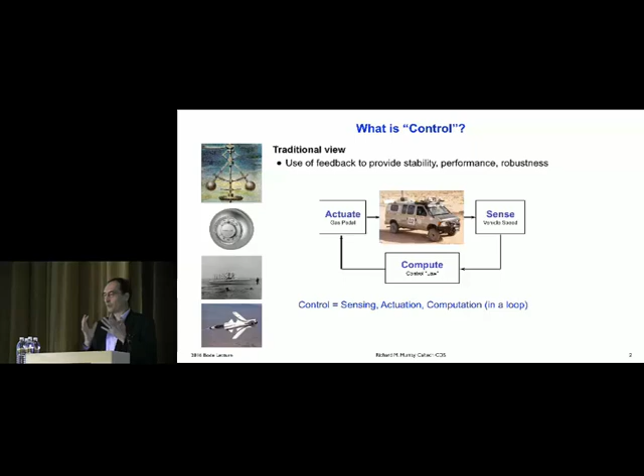But I think that this is changing some, particularly in the last 15 years or so. The emerging view that I would espouse is that control is a collection of tools and techniques for analyzing, designing, and implementing complex systems in the presence of uncertainty. In particular, it's this combination of dynamics, interconnection, communications, computing, and software that make controls work.

And so this notion of dynamics, uncertainty, feed forward, and feedback, just in case you forget, if you're a Simpsons fan, you can remember Duff beer. Duff should be the official beer of the Control Systems Society. And we'll remember that it's dynamics, uncertainty, feed forward, and feedback.

Now, there are a couple of principles that go along with that, and these are really unchanged over time. One principle is that feedback provides us a tool for managing uncertainty, both uncertainty in the system and uncertainty in the environment. Feedback and feed forward also provide us tools for the design of the dynamics of a system by combining sensing, actuation, and computation into the physical, chemical, biological, and information systems that we build.

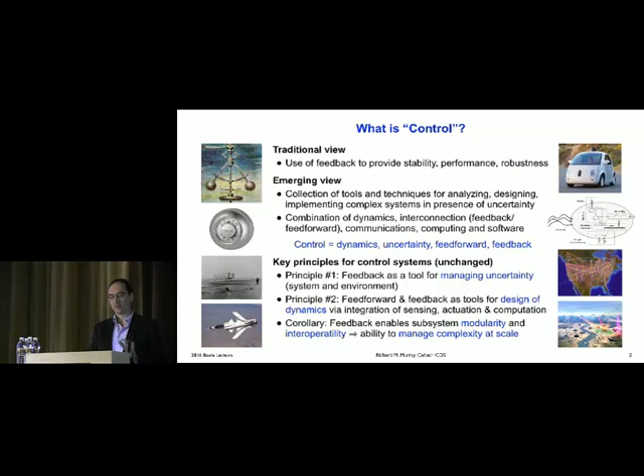These two properties together give a very important corollary, which is that feedback enables subsystem modularity and interoperability, and that's what allows us to manage complexity at scale. As we go forward, complexity at scale is the big challenge, and the control systems community is going to play a huge role in thinking about how we design complexity at scale.

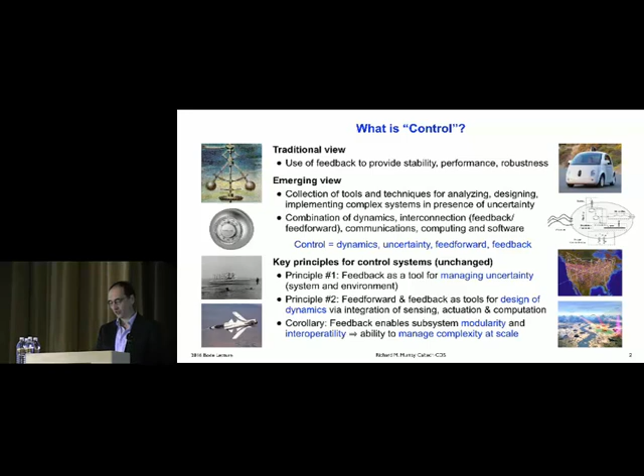Blogs didn't exist, Twitter didn't exist, et cetera, so you posted stuff on the web. And so I created a web page that was the top 10 research problems in nonlinear control. Why I thought I was qualified in any sense to write these down, I have no idea, but I did.

But a couple of them that were up there that turned out to be important in terms of what I actually did was this notion of using experiments to drive theory, thinking about writing good software for implementation of control, and transition to industry, right? How do we actually get these results to make a difference? And so I put these down in 95, and then sort of sat in my office and thought about these a little bit. And about 3 months later, I wrote down some new ones.

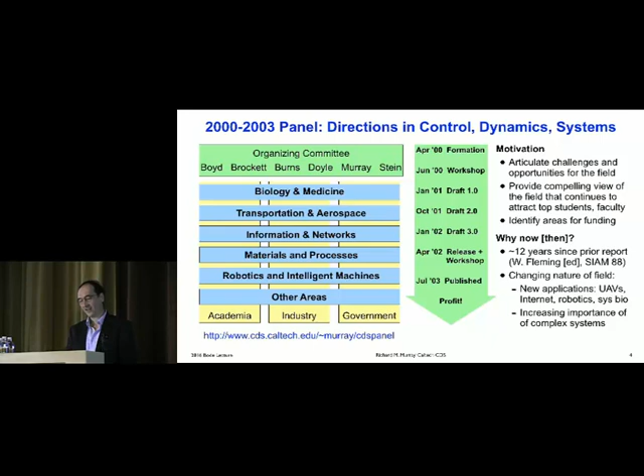That tried to pull together all of these ideas. And what's in the report, we organized it into an executive summary that tried in a few pages to describe why this was exciting. And then a next chapter that was a little bit longer that gave an overview of the field, what is control, along the lines of what I just talked about, the increasing importance of information-based systems, a summary of the opportunities and challenges.

And then in each of these application areas, we went through and talked about, right, what is happening in this area, why is this important, talked a little bit about education and outreach, and then made some recommendations and tried to justify those recommendations. So that was what we put into the report. And there were 5 primary recommendations at a high level that came out of this.

And those 5 were, first, to increase the integration of control, computer science, communications, and networking. Second, to increase the research at higher levels of decision-making, moving towards enterprise-level systems. Third, to explore high-risk, long-range applications of control, and we listed a bunch of areas that one might consider doing that in. Fourth, to maintain support for theory and interaction with mathematics, because we felt that that was something that had been very important for the field.

And fifth, to invest in new approaches to education and outreach to non-traditional audiences, right? To really make control something that was used more broadly than just the controls community itself. And so those were the 5 recommendations. And if you sort of look back and say, how'd we do? I think we actually did okay on most of these.

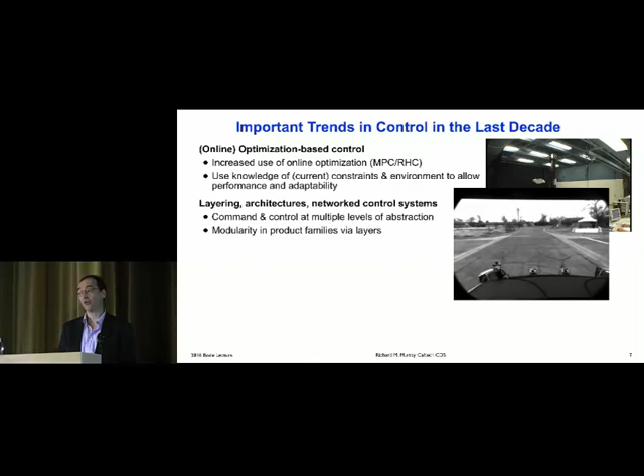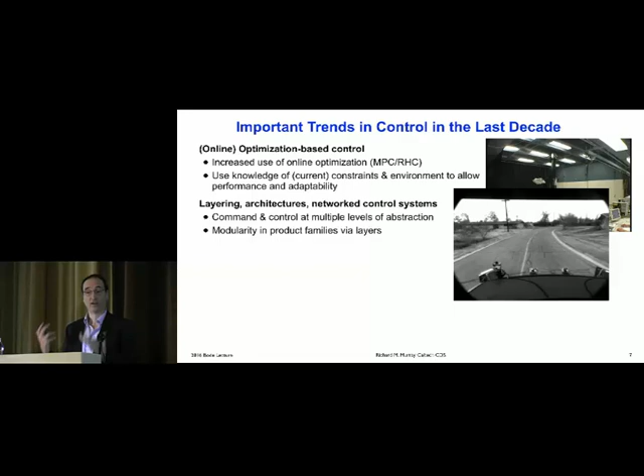So as I come up to an intersection and I see a car stopped, I need to know that that car is stopped. I need to stop behind it. I need to wait until it goes. Once it goes, I need to drive up to the intersection. And of course, this is the precursor for many of the things that we see in self-driving cars. This was a project that was done by a bunch of Caltech undergraduates, using some of the advances from our field. So I think that this is an important area as well that we've made great strides in. As I've already mentioned, I think one of the properties of control is that it allows this modularity that allows us to connect stuff up together very quickly and get very complex systems working together.

So we were thinking about this as you're playing soccer and you've got a bunch of people coming across the field and you want to guard each one of them. How do you do that in a distributed way? What information do you have to share? And it was a nice example of something where we wanted to prove that we could actually satisfy some property. So it was an example of applying these formal methods and thinking about hybrid and discrete systems, and the things that we're doing now in cyber-physical systems as a community.

And then the last area, I think, in which we started to make a lot of progress, this one's still a little bit more in its infancy, is thinking about moving to these enterprise scale systems. And in particular, as we look at things like the Internet of Things, the industrial internet, this is a GE term, I think that this is an area that we see happening in the world around us, and many of us are participating in.

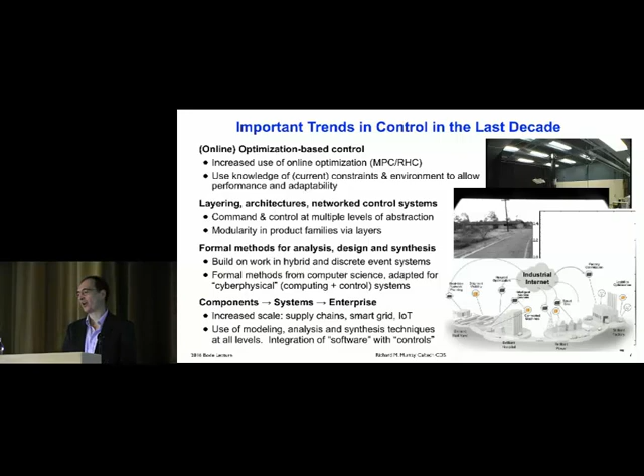The 5G communication network standards that people are talking about, they're talking about 50 billion devices, right? So how do we do things at the scale of some fraction of 50 billion devices, all managing our infrastructure systems and other things? So I think that that's something we're starting to see happening technologically, lots of future things we can do.

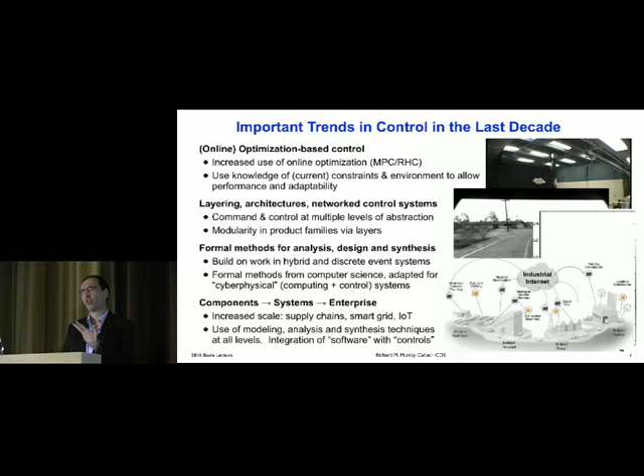Okay, so as we look back, I think that we sort of see what we were looking at, some of the things we missed, but a lot's happened, and I think it's a fantastic area. I want to talk a little bit about a couple of areas, and one of them is, what do things look like today in the area of network control systems? And so, as we think about what the design process looks like today as we design these complex systems, it's coming together quite nicely. There's still lots of work to be done, but it's coming together quite nicely.

We start with some physical system that we want to control. And of course, as control engineers, and increasingly we're getting involved in this very early in the system design, the first thing we do is we put together a model of the system, a model of the environment that the system is going to see. And we use that model to say, will this physical system satisfy it? Have I sized the actuators right? Can I turn the steering wheel fast? All of those sorts of things, depending on what the system is.

And if it's not quite right, we use that model to do design iterations, right? So we'll iterate on this design, and get it to where at least we have a nominal system that can satisfy the specifications. And then we'll start to design the feedback loops that go around that, perhaps starting with the inner loops and the lower level things where we're using sensors and simple Kalman filter processing, and PID loops and their ilk.

And again, at this stage, we may find out that the Bode integral formula tells us that you can't actually get all that you want out of this now that we start looking at the feedback properties and the noise rejection and other things. And so we may do new design iterations. Those design iterations may change sensing and actuation, may change the computational framework, the architecture, and other things.

And then we move progressively to higher levels of abstraction. So we move to an optimization-based layer where we'll start to do more complicated types of state estimation, maybe moving horizon estimation, particle filters, Bayesian inference types of things. On the control side, we'll do things that look more optimization based in terms of model predictive control, receding horizon control, and those sorts of online optimizations. And again, we may do design iterations here.

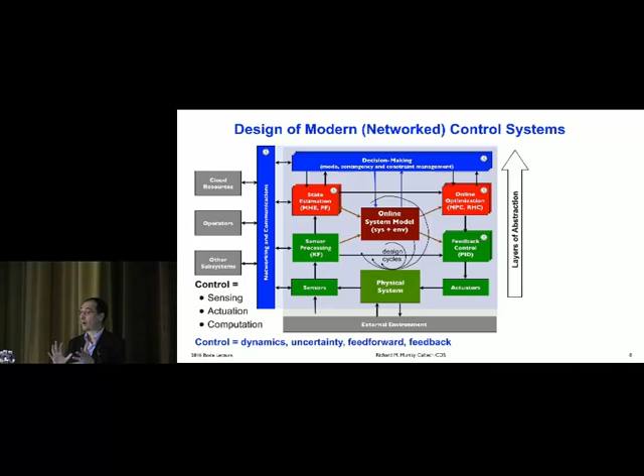And this is a problem where, if a computer scientist looks at it, they go, yeah, this is what we do too. They might look more at the higher levels than the lower levels, but we really have to look all across these. So there are examples of this all over the place: aerospace systems, self-driving cars, factory automation, process control, smart everything. And this is the type of architecture, I think, that we see, certainly in the industries that I interact with.

Now, there are a lot of challenges. One I think is interesting is to think about these layers of abstraction and how we connect them. How do we define what those layers of abstraction are and what the interfaces are between them? And how do we define what the contracts are? That is, what do I assume about the lower layer at the higher level, and what do I assume about the higher level at the lower level, so that when I interconnect these two things across these layers of abstraction, it works. And we know from the internet that those layers of abstraction and the modularity within them, the ability to change the underlying technology, is a huge enabler for moving forward quickly.

I think we also have to think about how we scale these to 50 billion devices or some fraction of that. You can think about that as scaling in the horizontal direction, so think about those as horizontal contracts. As we look at swarms and smart grid and other things where you have a bunch of systems at the same layer of abstraction trying to do the same thing but interconnected, how do we think about the horizontal contracts that might connect that together? And of course, all of this needs to be done thinking about stability, robustness, and importantly, security and privacy.

So this is, I think, what we need to think about and what we're currently doing in terms of control systems. And so I want to talk about a couple of the pieces of this just a little bit to give more insight and say a little about where I think there's some opportunities to do even more. So one is in the area of formal methods and control.

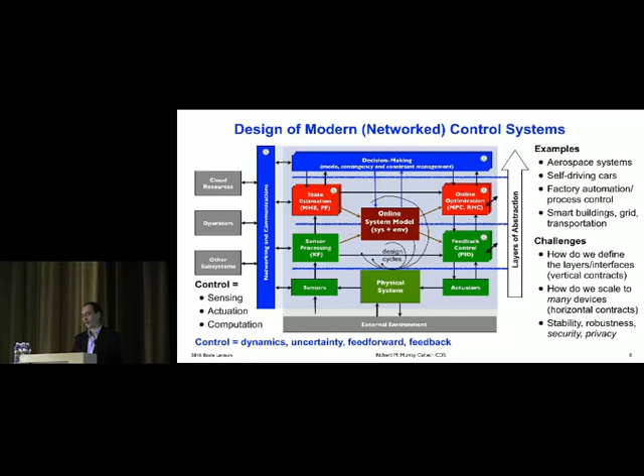And so Claire Tomlin asked me to give a talk at Berkeley, and she gave me the title of the talk. And so it was rapprochement between formal methods and control. I had to look up what rapprochement meant. But it was quite nice, right? Sort of the bringing back together, right? So reapproach of these two areas. And I think that's a very accurate thing.

So the discrete event systems community has been thinking about this for a long time, but really there'd been kind of computer science going off and controls going off, right? And now I think the two are starting to come back together, somewhat enabled by the history of the discrete event community in terms of doing that, but I think building more.

On the controls community, we'll think about a block diagram that looks like this, with apologies to John Doyle for drawing the arrows backwards. And the type of specification that we might do here at a high level might be some sort of an H-infinity style specification, right, where we say that we want some output measures, errors or whatever they are, to be bounded based on the disturbances, and also allow for system uncertainty, right? So we're going to capture that uncertainty.

And so certainly here we see dynamics and interconnection and feedback, if not feed forward explicitly, although as we know in many of these systems there'll also be a feed forward component. Now, we can redraw that diagram just a little bit as something that might look like this. So now we've got a plant, a controller, some sort of environment, unknown environment maybe, or the delta block up there could represent system dynamics or environmental dynamics and disturbances.

But I think an interesting question is to say, well, what happens when our description of all of those is in fact a discrete transition system, not differential equations or transfer functions? So now it's the same problem, right? This is the problem of how do I make decisions at a decision-making layer of abstraction in presence of uncertainty with dynamics for my system. I can't just make decisions arbitrarily for, say, self-driving and other things. I have to do so in a way that respects whatever the rules are, specifications are, other things.

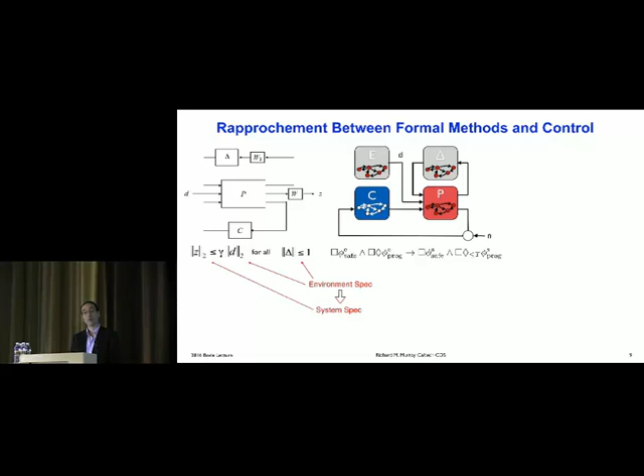And what I like about these two problems, the H-infinity synthesis problem and the GR1 synthesis problem, is they're basically both of the same form. There's an environmental spec that tells us something about both the disturbances and the unmodeled dynamics of the system or the environment. There's a system spec, what do we want it to do? And similarly, in GR1 synthesis, there's an environmental spec, as well as a system-level spec. And the synthesis problem is, given a model of the system and that specification, synthesize the decision-making logic that automatically makes that controller work.

And we do this in controls all the time. An LQR controller, I give you x dot equals Ax plus Bu. I give you a cost function that I want you to minimize, and I call the LQR command, right? And so we want to do the same thing now on this other side. And so this is, I think, an exciting area. It is very much, in some sense, at the heart of things like cyber-physical systems.

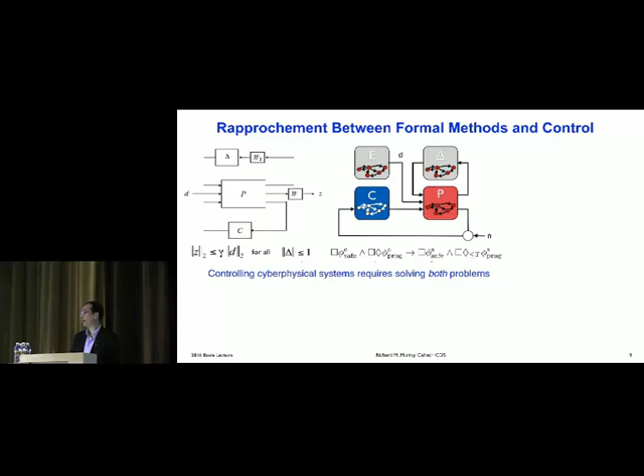And of course, you can't just solve one or the other. Well, you can, but then you will be relegated to your layer and not the layers in between. And so I think we have to figure out how to pull these things together and do this. And there are many examples, from aircraft to self-driving cars to the industrial internet, to do that.

And broadly speaking, I think that we really are starting to get more serious and more rigorous about the control of these sorts of reactive systems. The systems are clearly too complex to be tested by trial and error. We must use more formal methods. The controls community is fantastic at using theory to help solve problems.

The systems are much too safety critical to do this, so people probably know that for software, which is what control systems are these days, running in aircraft, you have to certify your safety critical software, so things that might lead to loss of human life have to be shown to be reliable, to have no more than one failure in every 10 to the 9th flight hours.

10 to the 9th flight hours is 100,000 years. How do you show that? You don't do it by testing. You have to do it by rigorous analysis combined with testing. And sort of think about that.

The other thing I think that we're starting to see a little bit of is moving from this design then verify, here's the logic, go tell me that it does the right thing, to more of a specify then synthesize. Tell me what you want the system to do, and then I will automatically synthesize the logic. And again, the controls community has been doing this for a long time. We're starting to see this come up a little bit more in the hybrid systems and computer science communities.

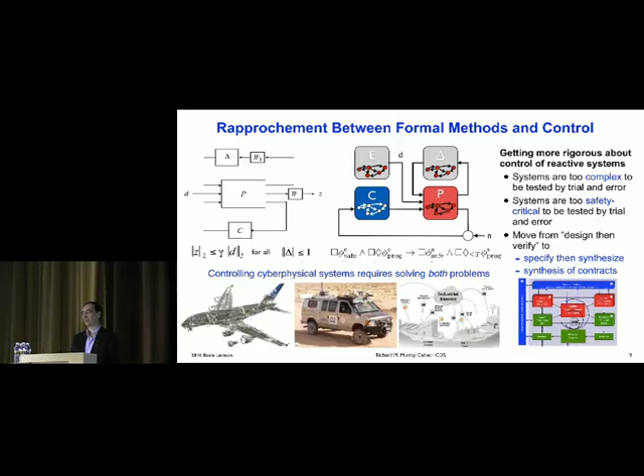I think a next step of that is to think about what are the contracts that we need to use at the different layers of abstraction, so that we can now synthesize the contracts. Here's what that optimization-based controller should do in terms of its specifications, so that when I connect it with a decision-making level and I connect it with a feedback controller, the overall system will behave in the right way. And so I think we need to think about how to do that, and some work is starting to happen there.

Another thing that we're starting to see a little bit more is combining both data-driven and formal methods types of systems together with controls and thinking about human-like interactions. And again, self-driving cars is really pushing this forward as we have to think about how do we make sure that humans can operate in environments that machines are operating.

And finally, I'll just point out again, for about the 5th time, that we need to be incorporating security and privacy guarantees as we do this. We don't want to redo what we've done before in SCADA systems and other things. It's not 'think about that, it'll get handled later.' No, it won't. We've got to think about it now.

And again, these ideas of formal methods and control and other things, there's great connections between observability and reachability and things like privacy and security. And so I think that the tools can come together there. Okay, so this is, I think, an area that when I look out now, I see lots of promise and lots of people working on it across the community. We see many things here at CDC about this.

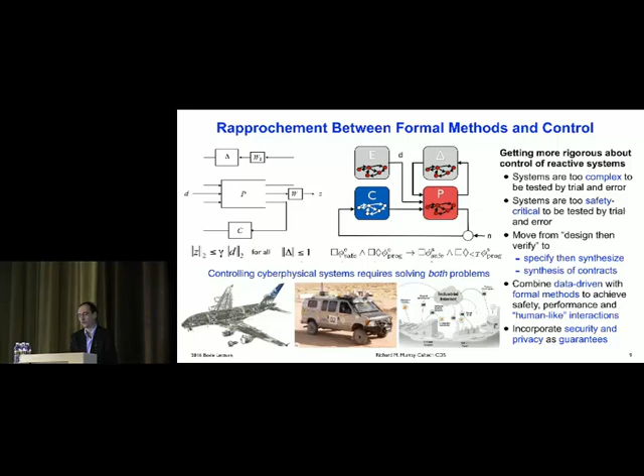So where do we go from here? This is sort of what's happening and what's currently here. So I think there are some opportunities for the future, and I've divided them into 2 pieces. One that I'll call traditional, and I don't mean it in a derogatory sense, but thinking about the things that we know that we do well. And so certainly one is what I've just been talking about. I think we need to continue our focus on rigorous design of complex systems.

One of the things that in the last couple of years I finally understood, people have been trying to tell me for a long time, I used to say, oh, Cyberphysical, how clever, they renamed hybrid systems, and they got more money for it. That's pretty cool, that's a good idea. Because you can't fund hybrid forever. So let's just call it Cyberphysical. But in fact, that's not right. Cyberphysical systems are different, because they're really bringing a computer science perspective to the control of physical systems.

So the cyber there matters. It's not just continuous and discrete. It's thinking about the things that computer scientists think about, right? And thinking about verification and model checking and scale and all of the other things that computer science has done so well. And really, that to me was like, oh man, I finally get it. I'm sort of working in this area, and it finally occurs to me why cyberphysical really is something that's kind of new and different.

I think the other thing that we have to think about is large-scale systems. The Internet of Things is coming. It's an opportunity. It's going to have huge numbers of devices on it, and we're going to start connecting those together. The 5G networks, right? People should remember the fifth G stands for control, right? Because really it's putting in the time criticality and other things. That's one of the goals of the 5G networks, to get the time criticality down to where you can use it for feedback control systems.

So guess what? We're going to get to use it for feedback control systems, but we're going to have subsystems that consist of thousands and millions of devices that are being connected together. And so how do we think about that, I think, is a good one. And again, data, security, privacy, humans, the things we missed the first time around, let's not miss them this time as we go through.

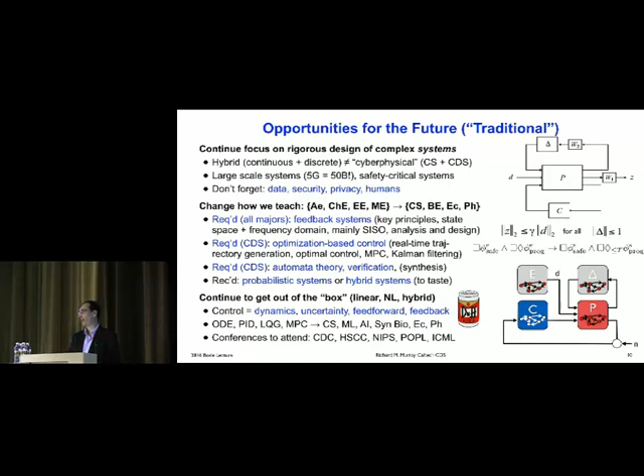So again, I would say we should think about control as the field that combines dynamics, uncertainty, feed forward, and feedback. Have a couple of beers, think about what that means. I think we need to go from just thinking about things like ODEs, PID, LQG, and MPC to thinking about computer science, machine learning, artificial intelligence, synthetic biology, economics, physics as what we think about as a field. And in addition to coming to conferences like CDC and HSCC, we should go to things like NIPS and POPL and ICML. And if you don't know what those are, go look them up, because they're important conferences for us to be represented in, and for those people to be represented here.

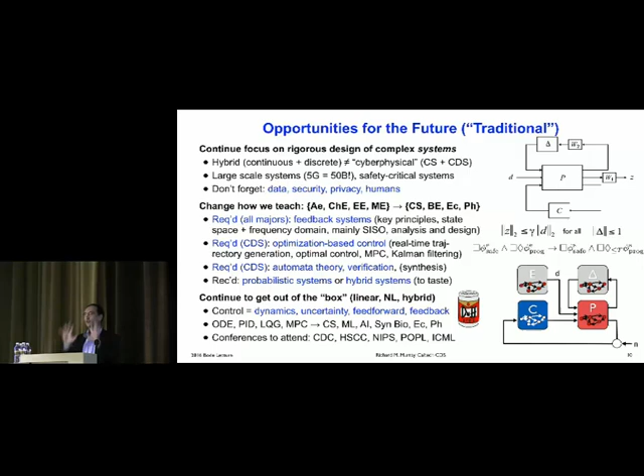All right, so in the kind of mainstream areas, I think this is one. I want to also talk a little bit about what I'll call non-traditional. And here I want to build on this recommendation from the panel report back in 2003 about exploring high-risk, long-range applications of control. In this area we have to recognize that this may be different than the more traditional ones. In particular, we may actually require new types of sensing, actuation, and computation, plus new architectures that are tuned to that. And it may not be the same as what we do in other areas. I'll use as my example an area that many of you know I've been interested in for a while, synthetic biology.

So here's what I'd like to do before I retire. I'd like to build the system you see on the right. This is a nanoscale machine. It has a bunch of subsystems in it. It has a power subsystem called metabolism. It has a sensing subsystem, an actuation subsystem, a communication subsystem, a computation subsystem. And all of these subsystems are regulated and co-regulated. This is, for me, an autonomous vehicle. But this autonomous vehicle is a couple of microns long. I don't know how to build that out of metal or other materials, silicon, et cetera. But biology knows how to build that out of molecules. So if we think about that as a design problem, can we design a 1 to 2 micron long robot that can find a toxin and neutralize it?

Or assemble a bunch of chemicals into food, right? We know this is possible, right? No question. Can we as engineers design such systems? And I don't care about the systems being living. In fact, I don't want them to be living. I want to design, I want to put it together. If I turn the power off, I want it to stop working, right? But I want to do it at that scale.

And so I think if we think about that problem, that one may require us thinking about, okay, fine. What does the sensing system actually look like? What's the actuation system? How are you going to do computation? So, for example, this is some of the work that we've done in this area. This is a proportional control law. All right? So this is describing a genetic network that implements a proportional control law.

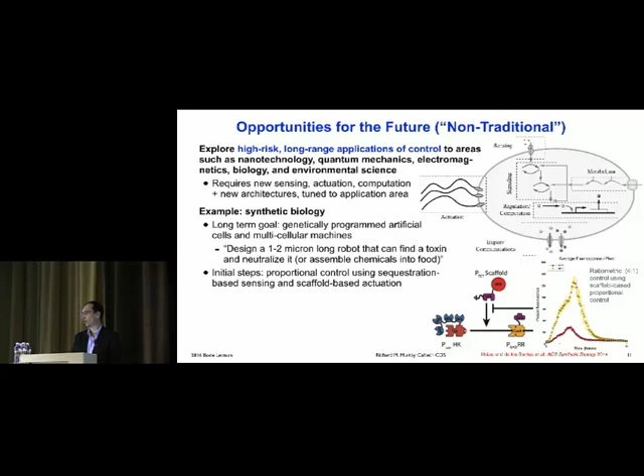In fact, we've implemented this and put it into cells. And this is what the response looks like. So the curve on the bottom is the input, and we're trying to maintain the curve at the top at a 4-to-1 ratio of that. And you can see, indeed, we're getting a good tracking controller at about a 4-to-1 ratio. So this is a molecular implementation of a proportional feedback controller from about 2 years ago. So you can see we've got a long way to go to get to that upper right diagram.

Right? So there's a lot to do, and a lot of it is, what the heck's the sensor? What the heck's the actuator? How are we going to implement the computation? So I think in these long-range areas, don't talk to me about abstraction hierarchies and how to use linear temporal logic. Not there yet, right? Just figured out how to get proportional control to work, right? Working on PI, all right? That's kind of the state.

Okay, so I think advances are going to be required, though. These are very stochastic systems. They have huge amounts of uncertainty. The traditional models that we use are probably not the right ones. And I think that the control architectures are likely to be different here, right? Again, we're going to have to continue to focus on dynamics, uncertainty, feed forward, and feedback, and the key principles that feedback and feed forward enable. But I think that the architecture of how this connects together may be different.

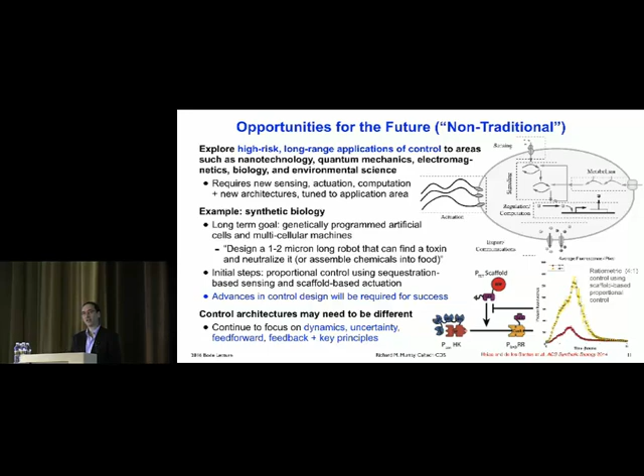And the architecture that I usually use, for those of you who've seen me talk about this before, in this particular case actually doesn't look that unfamiliar. So here's a block diagram showing a bunch of systems, the blocks with some unmodeled dynamics, some nonlinearities, here modeled as static nonlinearities, connected with an interconnection matrix, that L matrix, and then a bunch of delays. And now what you should think about is, if this is a bacterial system, there are about 1 million elements in the dynamical system, right? And so now you've got a 1,000,000 by 1,000,000 interconnection matrix that you get to design.

What structure should you put on it? Right? If this is the brain, it's 10 to the 11th neurons. So if you want to design something that looks like a neural computation, how do you decompose that problem? At a very high level, maybe it looks like this, but what goes underneath looks very different. So I think that that's kind of a different thing.

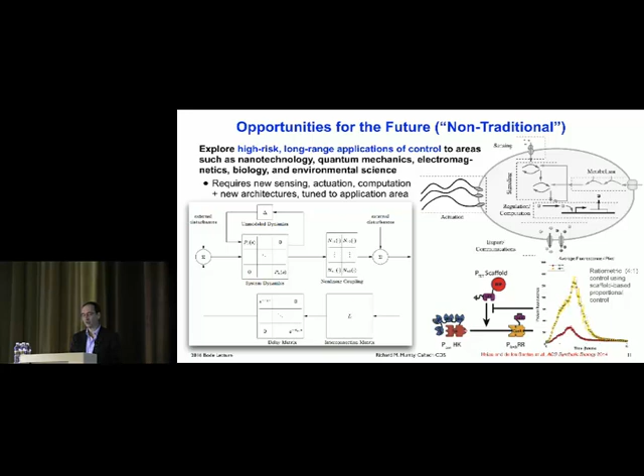Okay, so I told you a little bit about what we've done. I sort of want to wrap up. So I started and told you a little bit about this experience, which for me was a very important one, of thinking about what the future might look like. I think we got some things right. I think we missed some things. I think by and large, the big picture there was pretty close, and it led to lots of advances.

I've been very fortunate in my own career and in the things I've gotten to work on, to work across a number of different areas and to think about how some of the ideas that we articulated back in 2003 might play out, and whether that's in the sorts of architectures that have these layering and formal methods and other things that we might use for modern systems ranging from flight control to self-driving robots to different types of Internet of Things architectures.

That's one area, but also in these more novel areas, which in my case is synthetic biology, but for others of you is geoengineering, what are the actuators there, or quantum mechanics, right? What are the sensing mechanisms there and how does that differ? I think all of these are interesting areas.

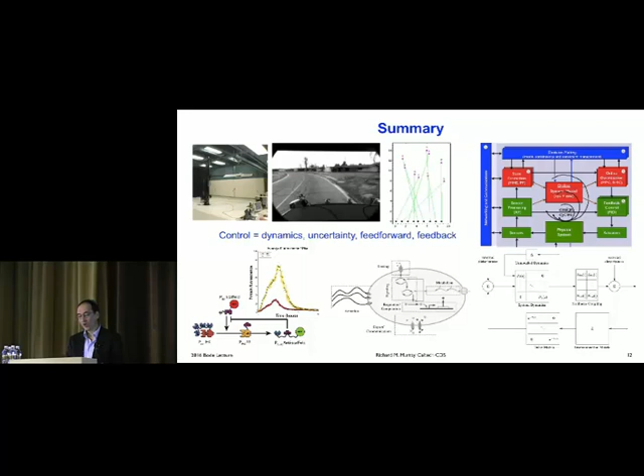So I'd like to end by just thanking a couple of people. So one is the various groups that have supported the research. This includes AFOSR, and in particular, Mark Jacobs and Siva Banda have been extremely supportive in my interactions with the Air Force. The National Science Foundation, DARPA was an early funder of this work, the Office of Naval Research and the Army as well.

We also received a lot of interaction and support from companies. So Get Industry to Support finally worked. It took about 20 years from when I first wrote it down, but they finally started helping out. In particular, I'd like to acknowledge United Technologies, Northrop Grumman, IBM, and most recently Denso.

And it turned out, and this is, I think, important for the field to think about, for me moving into synthetic biology, there were two enablers. One was the Army, interestingly enough, through the Institute for Collaborative Biotechnology that Frank Doyle actually ran for a while. And the other was the Moore Foundation, which gave some money to Caltech that allowed us to do that.

And I think we have to think about as a field, how do we get money for doing blue sky stuff, right? That I can't tell you why this is beneficial to society quite yet, but I think it probably is interesting, and how do we do more of that? So I think that's something we have to think about.

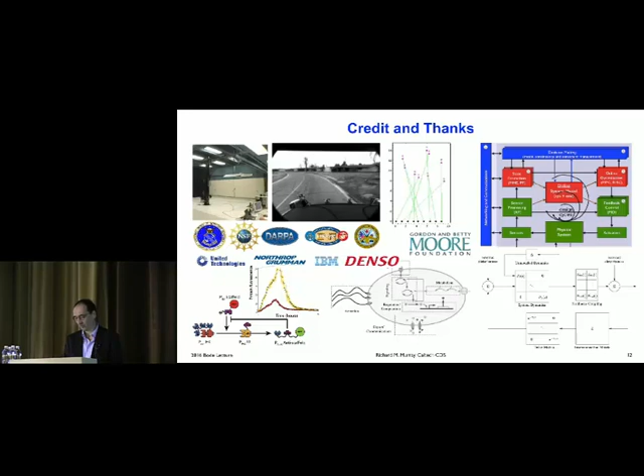Of course, all of this was also helped by a tremendous number of people, and I'd like to thank just a few of them. One is certainly the group that I worked with on the future directions of control: Carl Åström, Siva Banda, Stephen Boyd, Roger Brockett, John Burns, John Doyle, Mark Jacobs, and Gunter Stein. This really shaped my worldviews, and these were leaders in the field at the time that I was interacting with them, and they still are, of course. Really, I think that group and the broader group that participated in this made a huge difference.

I've also had the pleasure of having a lot of undergraduates. Caltech has a program called the Summer Undergraduate Research Fellowship Program, SURF. I've had about 150 SURF students over the years. This is a fantastic way to explore new areas, because they do about a 10-week project, and then they go away. So at 10 weeks, you haven't wasted much of their life with some harebrained idea that didn't work out. So I very much encourage everybody to do that. And I've had a huge number of visitors over the years as well.